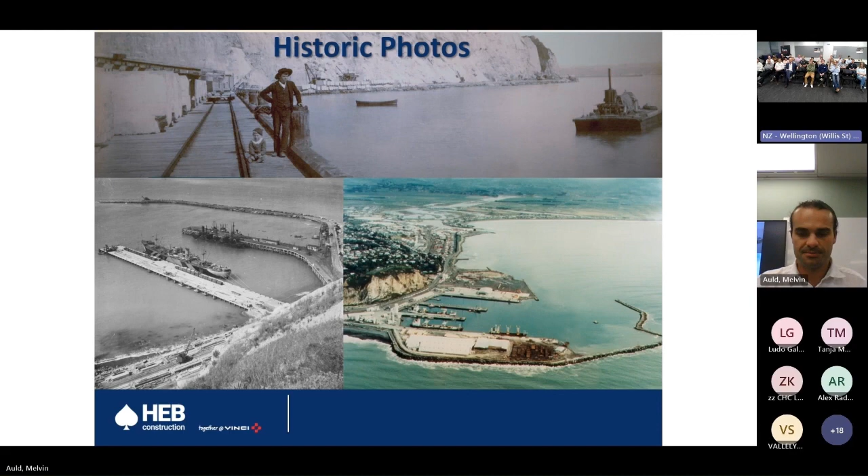Project conception and timeline. Why was a new wharf needed?

There were several reasons, but the primary reason was shipping congestion. This arose when ships longer than 250 metres were moored at number 5, rendering wharfs 1 and 2 unusable during those periods. That was costing Napier Port significant money, so they looked into an option to design and construct a new wharf.

Moving into the timeline of the project, 2006 it kicked off with optioneering on locations for a new wharf. They searched around, and from 2006 to 2015 they looked in this area, but that came unstuck with resource consent because it was going to affect the beach, fishing, and diving.

So then, 2016 to 17, the new wharf was planned to be put out here, and Beca engaged to do some design work on waves, erosion, and sediment control.

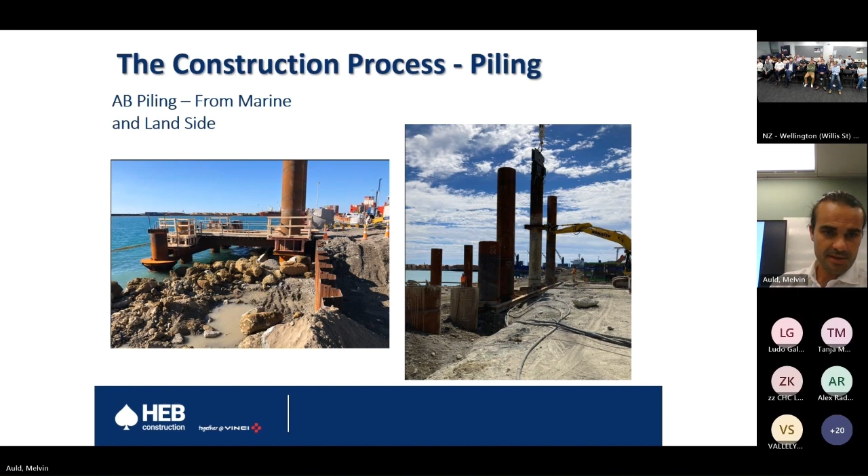We move on to the second stage, the CDE gate. At this point in the project, it was HEB's biggest piling gate, and it would cantilever off the first two rows of piles. We'd then put a couple of temporary piles in at the far end, balance off that, and install the permanent piles.

We had a few issues on the piling front — I'll talk through two of those: rocks and gas. Large rocks were found left over from an old revetment. Hitting these resulted in crushed casings, so we required a probe piling installation, welding on shoes and breaking up the rocks before the permanent casings were put in. This slowed the start of our works, but it only lasted 40 to 50 metres, and then we could go back to normal piling once we got off the alignment of the old revetment.

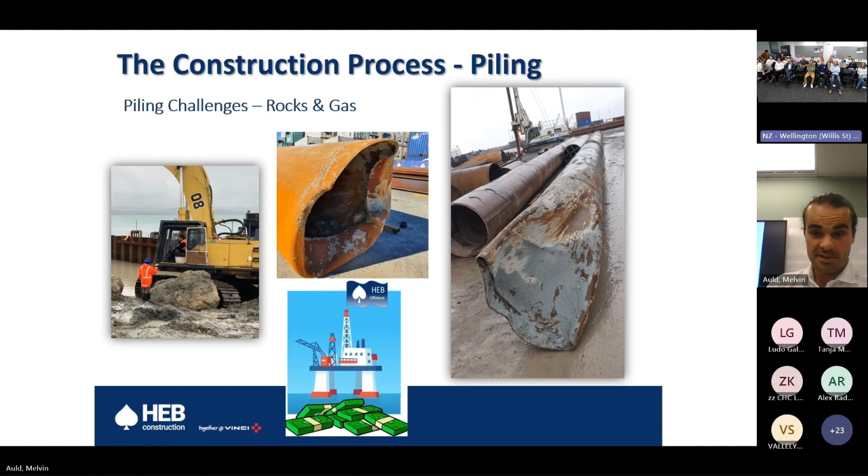That's the piling. Onto the revetment. I'll talk a bit further about this one, this was my section of works. You can see the typical cross section there, and then the plan view down the bottom.

I believe Beca designed the revetment in a simulation pool in Australia, and that was done in the ECI stage, so when we turned up on site, the design was complete. You've got an underlay of rock sitting on some geotextile, and then a series of blocks on top, nicely stacked together. The different colours refer to different dimensional blocks, so there's a whole range of them.

I talked about the rock getting barged down from Whangarei, so there were 16 loads of rock barged down. That last barge load, we had to be pretty calculated to make sure we had enough and didn't run out and have to order an expensive balance load.

Also in that photo on the right hand side, you can see our precast yard where we had around 20 to 25 moulds, and we'd pour those blocks there and then store them on site. You can see some down at the bottom right hand side that I'm laid over.

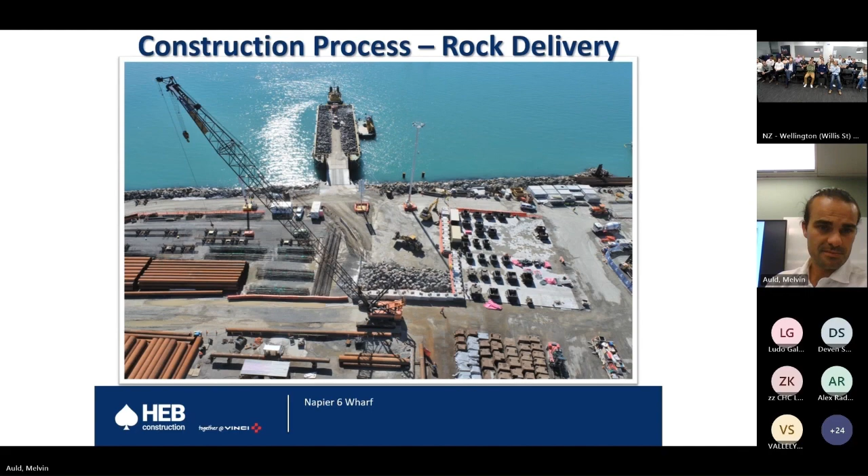Won't talk too much about it, but we placed cloth with this gadget out here that would release the cloth over the piles, and then when we're outside of the pile line, we held it together with some reinforcing to make sure we got the overlap required.

The rock placing we did with a rock bin, we'd split it up into different zones, different bins, and the operator would place a nominated layer over the whole revetment. Then we'll move on to the next one.

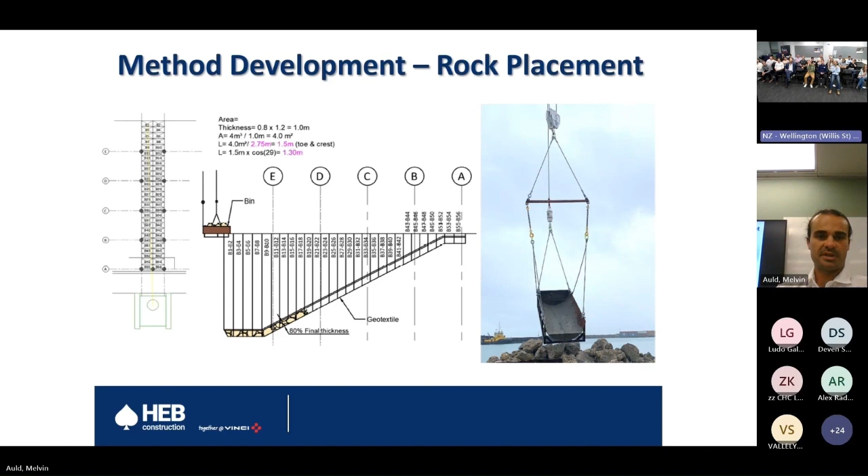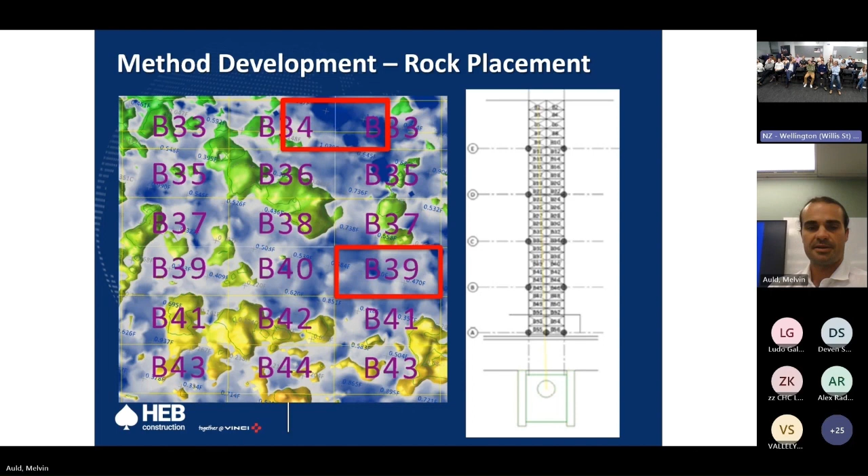So that's the rock onto the armour blocks. We originally started with 7 types of blocks, this is the design when we turned up, and we needed to work out how we're going to place these blocks and how it's all going to work.

The first bit of work we did was a trial with the blocks to work out in the quarry in Whangarei how they would stack up. We quite quickly realised with Beca there that we needed some tolerance built in, otherwise the blocks would end up on the top of the crest in no time, just with no play. So we put a 50mm chamfer on the blocks, so they would come down, and that allowed the blocks to take up that tolerance for when they were on rocks and not on a completely flat surface.

Then we moved on to working out how we're going to place it. We had a few different options that we looked at, using the crane, using grapples, using grabs. We decided that we needed a fixed grab to be able to physically force these blocks into place, and just releasing them with a crane and one of these other contraptions wouldn't give us what we needed.

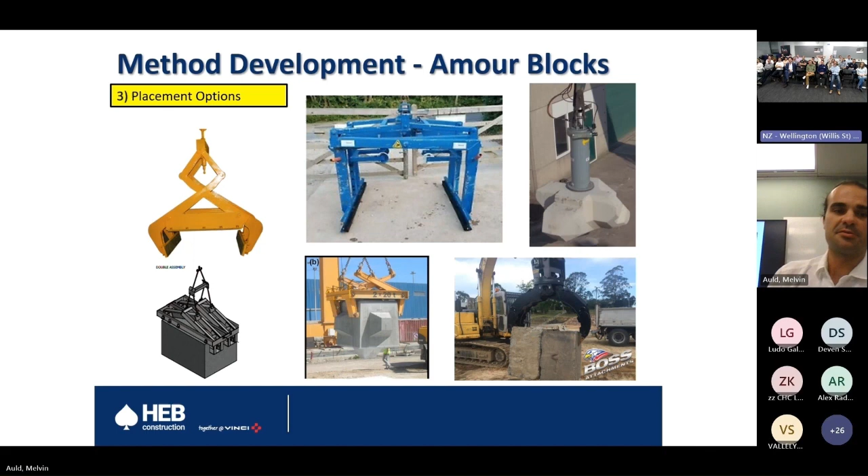The tilt rotator - we were lucky that there was one already out there large enough. So now we knew how we wanted to place them.

So the next thing we looked at is how we grab these blocks. We proposed a recess into the block so we could physically grab it, and we'd be grabbing the blocks from the same position each time. That would give us some certainty around placing them.

And with that, we realised that the blocks above the piles needed special inclined recesses so that the grab could actually place them. See the clash there.

And then also the blocks didn't have a design tolerance built in for the piles, so we were able to show that we needed some tolerance there. So we worked on some 'bird's nests', as we call them, to take up those tolerances.

So our 7 blocks grew to 15 different types there. We had to keep track of all of this while we were precasting and knowing where the different blocks needed to go. It's just a 3D image of the grab we signed off.

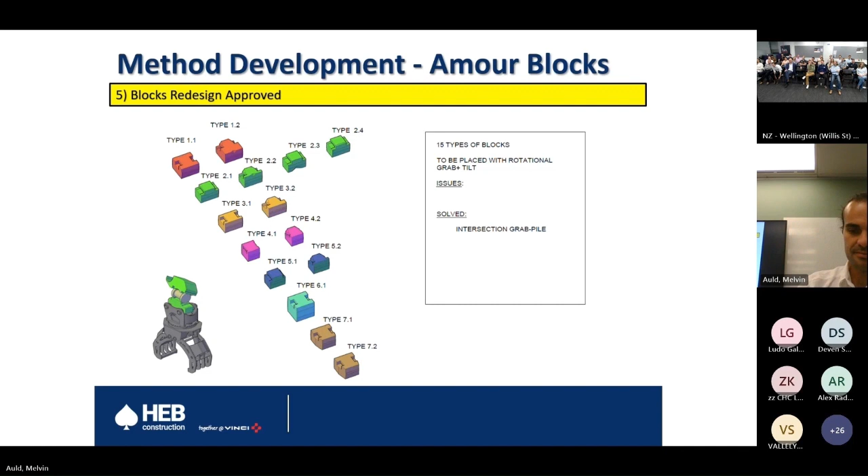I won't talk too much about it, but there's quite a bit that went into the actual surveying, installation of a sensor into the grab - not something custom, so we had to work through that.

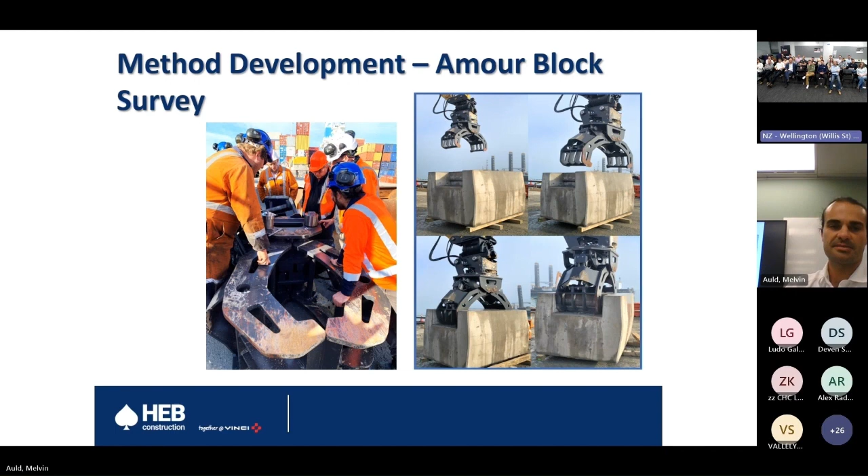So we would work down the wharf that way, and then there's about 100 metres at the western end of the wharf that had revetment to construct, but no piles. So we used an outfit from Picton - some of you guys might know him, Bo, from Nautilus - and we had our 120 on the barge, and we were ferrying blocks onto it.

You can see one up the top end there, landing on the barge and placing it. Quite a few tricks around placing blocks off a barge there, which we learnt.

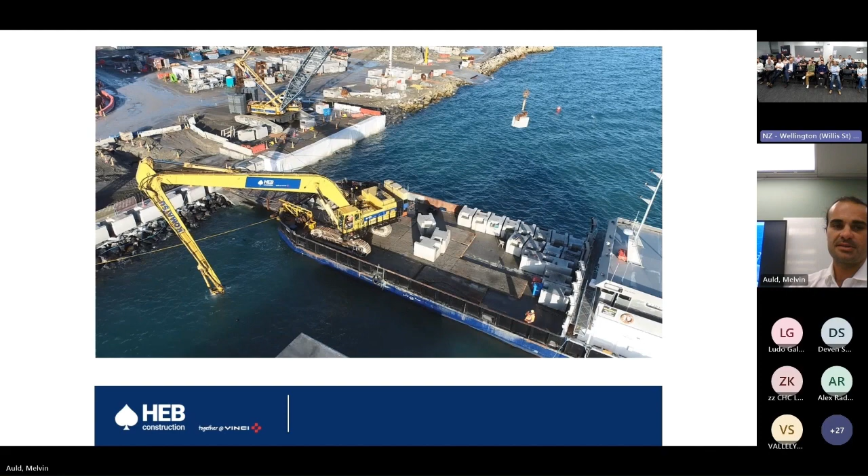So some of you might be asking how the operator knew what he was seeing, placing some of these blocks, well, the toe was down 14 metres and no visibility. So we had a system called Trimble Marine Construction in the cab, and he's pretty much playing a computer game.

But we had to work with Trimble to come up with this too. So I'll just push play on this.

So this is the operator placing a block. He's reaching down - it's got a few different views there, but he's basically putting the green block within the red block.

The tilt - he's got the rotation.

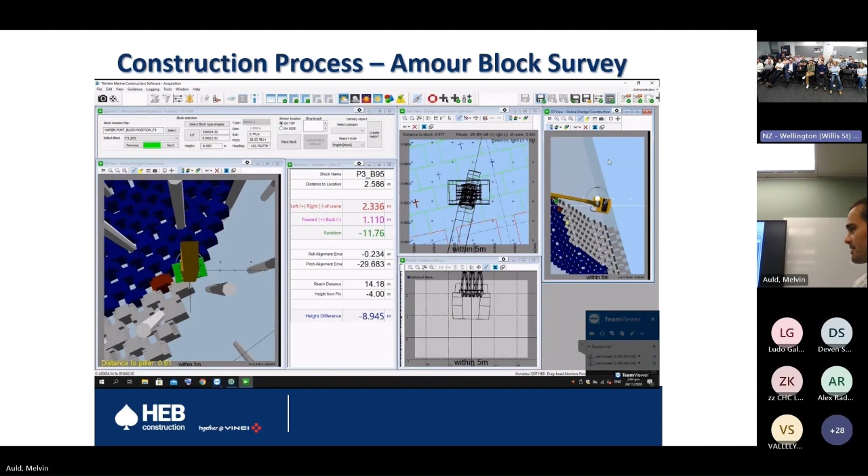So it wasn't any old operator that could do this. We needed a young guy with some skills. We started with quite a few, to be fair, but yeah, we ended up with a guy that does 95% of them.

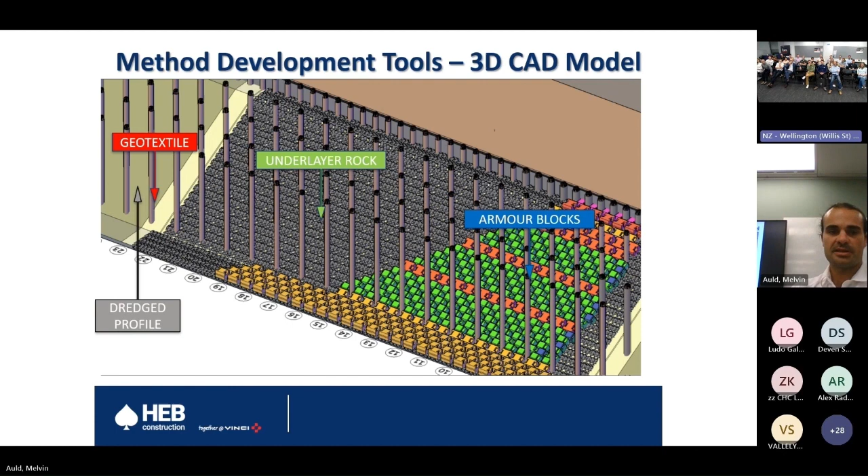It was, yeah, we needed to create our own 3D model - we were just working off the 2D drawings. So this gave us good insight of what we needed to do, and constraints around piles and diggers, and also presenting it to the guys and showing them where to sit and how to place it.

Another tool we had was a scale model, and we placed a whole bunch of rock on there - I'll just skip through this - but it was another good tool to show the guys on the ground what we're trying to do, and troubleshooting with them and Beca.

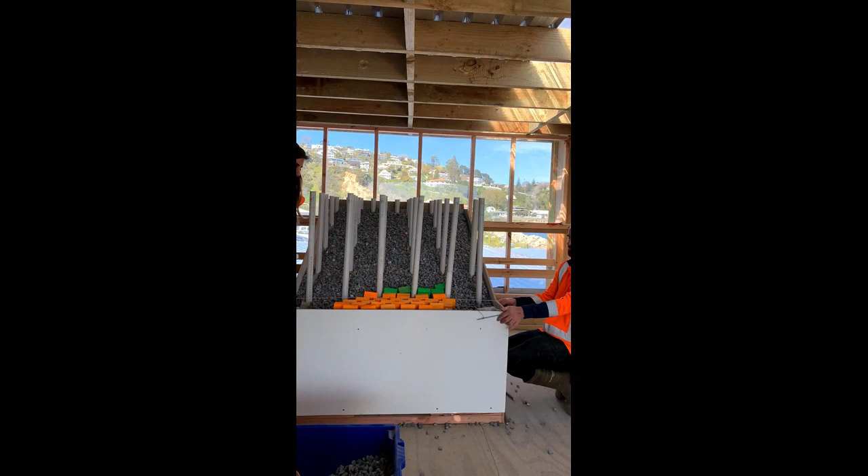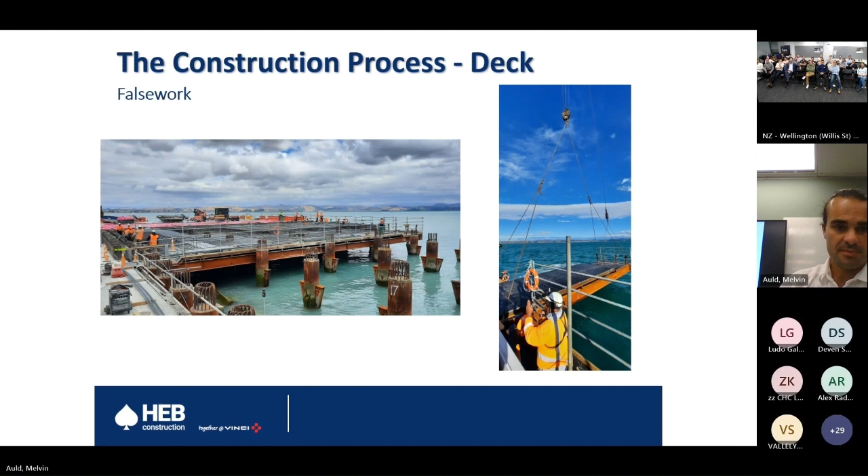It's another view of the first concrete pour happening. So it was a big push to get that through before December, before the end of the year. I think it was 2020.

The crane would walk on the previously poured concrete once it had hit a certain MPa, with the reinforcing on the landward side, and he would operate from there and then pull the forms out. We were getting 8-day turnarounds for a pour, and there were about 30 pours total to be done.

Moving on, I threw this one in here. I couldn't not share the crew we had there. We had a whole bunch of good people and quite quirky people as well, and it just brought out the best in everyone.

Down the bottom there, that's our construction manager. Some of you will know him, Nick, beating up our supervisor at a Christmas do. This guy up in the top right was called Boots. He was fairly quirky, he had pink hair and a set of tits to go with it.

It just all added to it, and it was a good environment. Bottom right, we were lucky enough last year to take out the contractors award for over 100 mil.

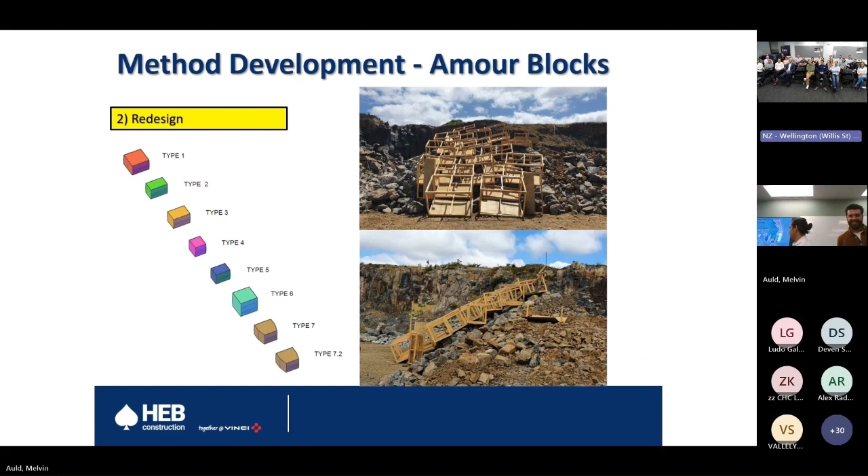Yeah, sounds good. Right, so the question, just for anyone who didn't hear, is just how the moormaster's going, with I understand you have quite a tricky wave frequency out there.

So the additional moves required from our marine team and the shipping lines was significant. The initial basis of the business case was to get those larger vessels outside that inner harbour area. So now we bring the vessels past the vessels on 5, with 5 being our number 1 container berth.

Cool. Do that. Yeah. Thank you.

Moving on to the Moormaster question. We've definitely had our challenges bringing a new piece of technology into a space where we weren't all as experienced as expected. As with anything new, it took about 12 months for us to get into a position where we're getting great utilisation out of that berth.

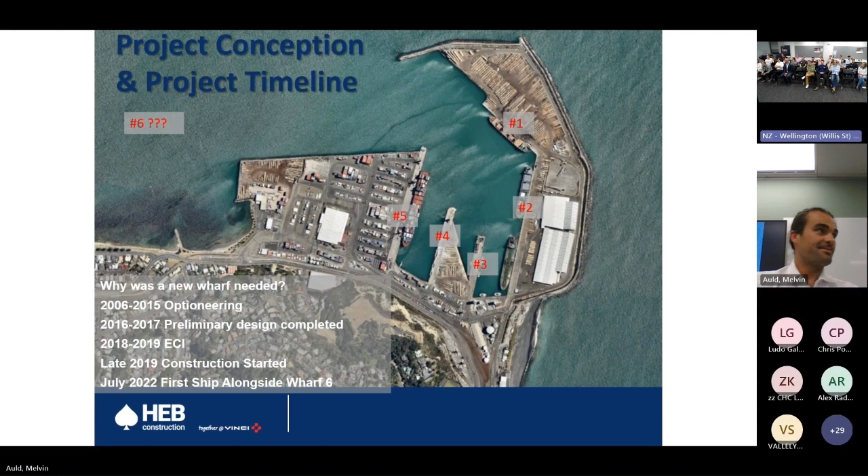That's awesome. I'm Andy Brown, part of the PIANC committee and an engineer with Tonkin and Taylor. I've been asked to jump up and tell you a little bit more about PIANC. Does anyone know what PIANC stands for? No? The chair doesn't either, so that's a good start. It's the Permanent International Association of Navigation Congresses, which is a bit of a mouthful, so it's now referred to as the World Association for Waterborne Transport Infrastructure. It's been around for about 140 years.

Its primary function is basically to bring people together working in this industry so that knowledge can be shared. As Matt was saying earlier, one of the big key outputs of PIANC are these technical publications, which you're probably quite familiar with, some of you as design engineers. They're developed through a series of technical working groups through four commissions.

So you've got Maritime Navigation, Inland Navigation, Environment, and Recreational Navigation. They bring together experts from around the world to create those working groups, which go on to create the publications for use by us. Another key thing is PIANC aims to support your career through mentoring, providing a platform for networking, and events like this. I'll leave it there for now, but I'll jump up later and tell you a bit more about the benefits of being a member.

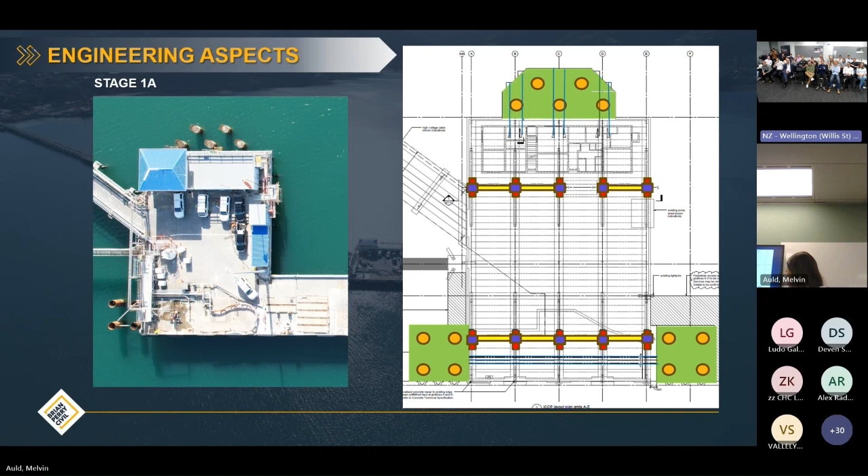Here's a picture of the gravity clamps we're installing around the raker piles at the moment. After we have all the new structures installed and post-tensioned, we're going to install jacks on each side of these gravity clamps. We'll jack the wharf a little, cut the raker piles to separate the existing structure from them, then remove the jacks, and the structure will sit on some plates.

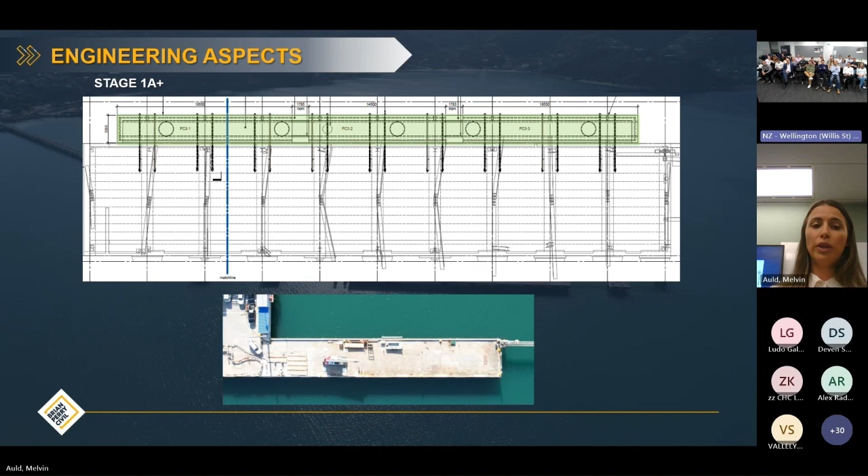Stage 1A plus is basically a new structure on the back, connected to the existing structure the same way as the pile cap on the back of the main wharf extension, with post-tensioning stress bars. Stage 1B involves 2 new mooring dolphins, A and B. On MDA, after we finish building the new mooring dolphin, we are also going to demolish the existing one once the new one is up and going.

During the presentation, I'm going to focus more on the challenges with construction. Because we're talking about Seaview, the first thing we talk about is location. The area is extremely exposed to high winds, especially the southerlies, which makes the job quite interesting.

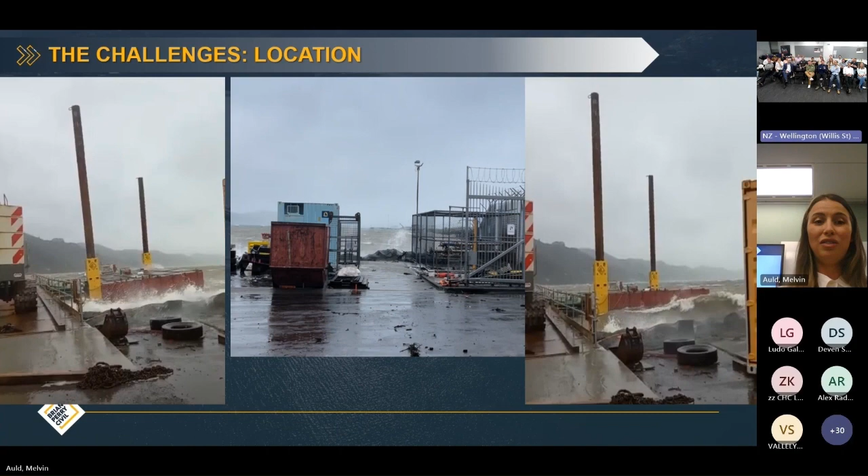This is one of the reasons why we need to do the project mostly from jack barges. We installed a temporary staging structure close to our compound to assemble the barges and to load and unload them as needed. The good thing about jack barges is you load the barge as soon as you are located where you need to be to complete the works. You jack it up, usually to a meter and a half above high tide to allow for waves or storms so it doesn't affect the barge, and then you have a very stable platform to work from.

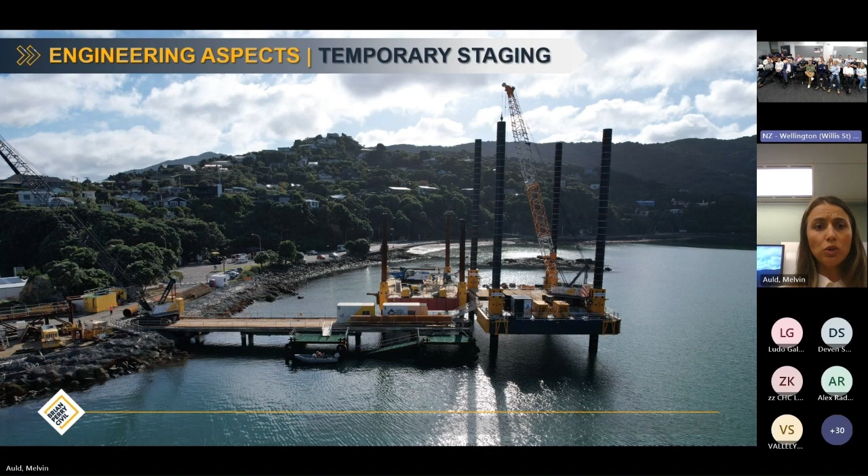So that was one of the reasons that the job was chosen to do from a jack barge. This is the video of one of our jack barges with the 250-ton crane on the deck. That helps to complete the works for piling and to do all the heavy lifting on the wharf as well.

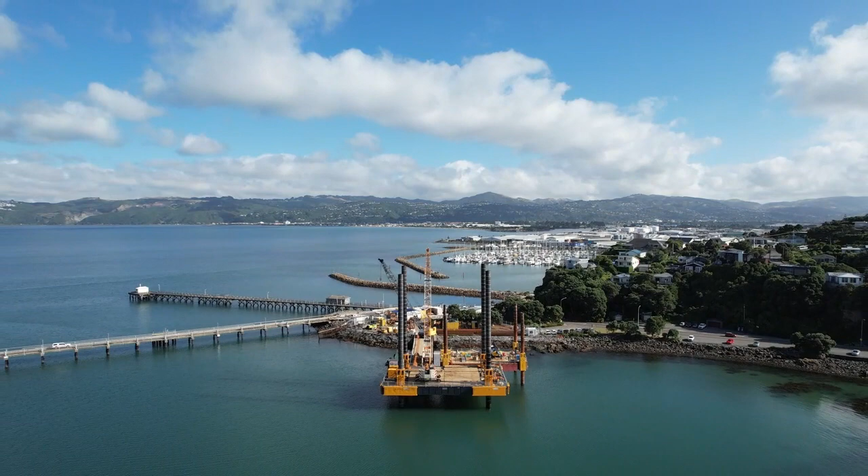Space as well is another thing. We don't have a lot of space on the wharf, so because of the situation with the structure, we don't have a lot of opportunities to put equipment, tools or material on the wharf. We kind of found space to set up our compound, but anyone who's been in Seaview before knows it's really tight anyway. So we have a bit of a lay down area, but not much. We try to reduce the amount of work that we do in situ, so the more we can do off-site and just bring it to site when it's ready for installation, we try to go that way.

Another challenge that we have is the environment. Seaview Wharf is located within the Wellington Harbour, which is the habitat for several marine species, so we need to be careful when working around them. An example is before we even started the project, before we even started building our staging, we had to find a way to protect the penguins nesting around the riprap on our compound area. We found that installing netting on top of those rocks would stop the penguins from going back to their habitat, which wasn't very nice, but it worked.

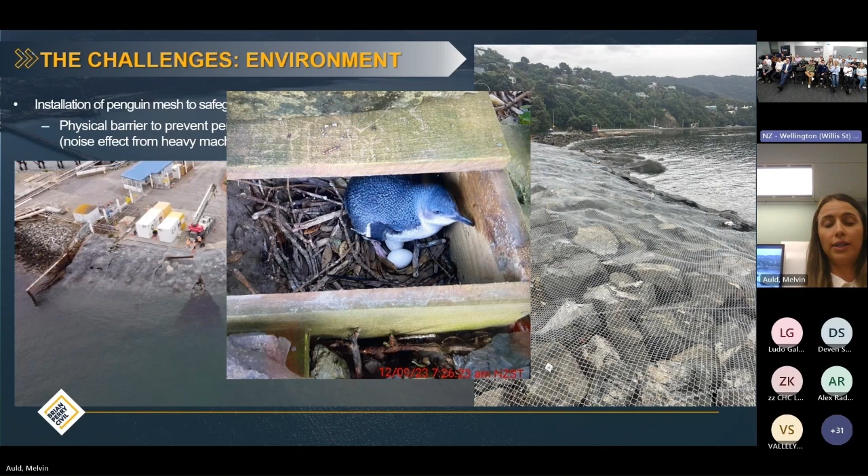We had to put a lot of management plans in place to start the project as well, and abide by the rules of our resource consents. Another challenge, and this is a big one, is that throughout the project the wharf remained operational. So we work with outages - we have two weeks of outages where no ships can berth on the wharf, and then two weeks where we need to work while the ships are in there.

So we've come a long way since we started the project. At the beginning, it was really restricted - we were not even able to walk down the wharf. The fuel industry didn't want us around them. But then after a while, CentrePort managed to get a matrix of permitted operations to have us working around those ships when they were there. So these days we are able to do a few things. It is still quite restricted, but much better than it was before.

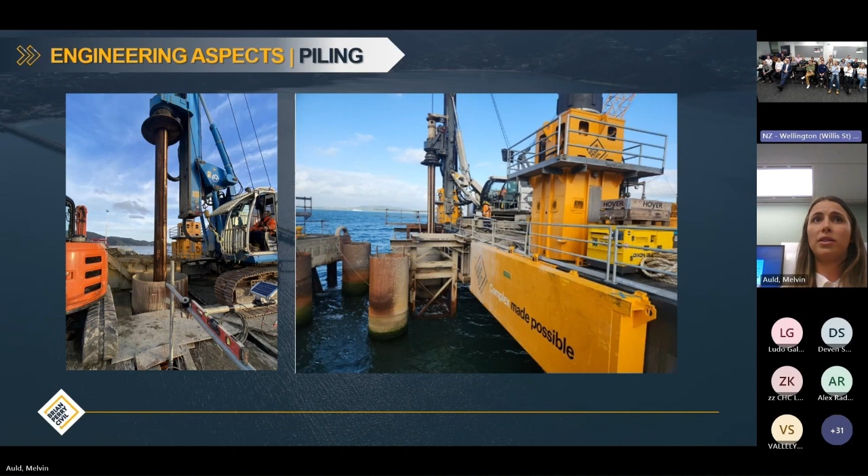Piling - construction aspects of piling. Here's a photo of the drill rig on the barge with some piles already installed, and the drill rig drilling one of the piles. The piles are 1.5 meters in diameter. The casings are about 23 to 25 meters long, very heavy, so we're glad that we have a big barge with a big capacity to lift everything in place.

The thing with the mooring dolphins is because they are so far away from Seaview Wharf, the ground conditions are a little bit different. It's a little bit softer, so the casings had to be about 5 meters longer, which made things more complicated. So we're not able to lift everything in one piece anymore, and we need to splice it in place, which takes a little bit longer to finish one pile.

The photo on the right is one of the concrete pours we're doing, a tremie pour for the pile. We need to overpour 500 mil to achieve good quality concrete from the bottom to the top. The skip on the side catches all that slurry and the overpour, so the team doesn't need to come back later and break concrete, because you can imagine how hard it is to break concrete in the middle of the ocean.

The concrete cutoff level is really low as well, so it's really hard to work there at high tide. When we're doing a concrete pour during high tide or with a bit of bad weather, we're not able to do this, so we overpour and leave it there. Then the next day, the guys go back and break the concrete.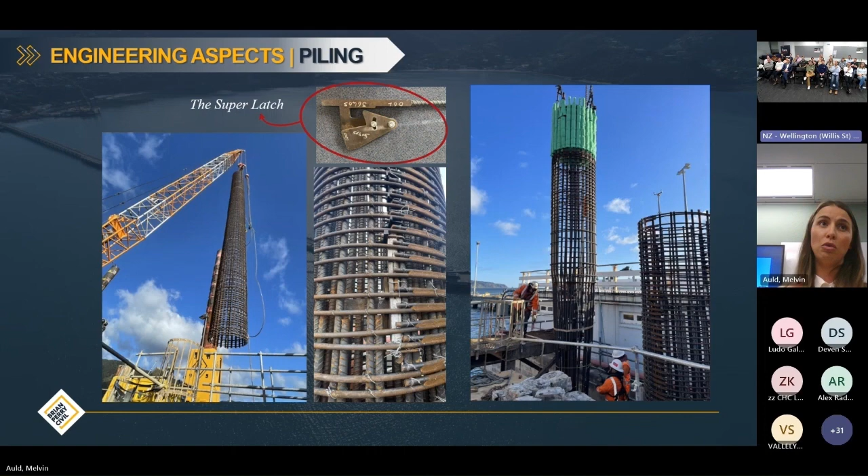Another thing we did in this project was implement a different type of splicing on the cages. In New Zealand, usually when you splice cages you use U-bolts, so the guys need to put their hands through the cage and splice every single bar with U-bolts. Because the cages were very long and heavy, we came up with the idea of installing a 'super latch' on one cage section, and plates on the top section. When you install the top section, the plates go inside the super latch and it locks. So you save time and remove the risk of guys having their hands through the cage.

When we're doing piling, we also need to monitor the electrical conductivity of the water, because Seaview Wharf is located in the Waiwhetu aquifer area, so we need to keep an eye on that. We also need to do underwater noise monitoring, because installing the casings with a vibro hammer or drop hammer, and drilling as well, creates quite a lot of noise underwater. So we install a bubble curtain around the piles - basically some pipes connected to a compressor that release bubbles, and that curtain of bubbles mitigates the noise dissipation.

One nice thing was the first bubble curtain we bought before starting the project was from Canada. It was just a massive pipe we had to put around all the piles, and we had to use divers and put weights on it to keep it at the bottom of the seabed. As we went from one pile to the second to the third, the site team came up with a very good solution - building a new bubble curtain that would go around one pile, since we only do one pile at a time anyway. It works even better than the one we bought, and I must say, the one we bought was really expensive.

Precast elements - like I said, because of the location of the works, the weather, and the level of the wharf, it's really hard for us to do everything in situ. So we had several meetings with CentrePort and the designer to come up with a few ideas on how to build those pile caps.

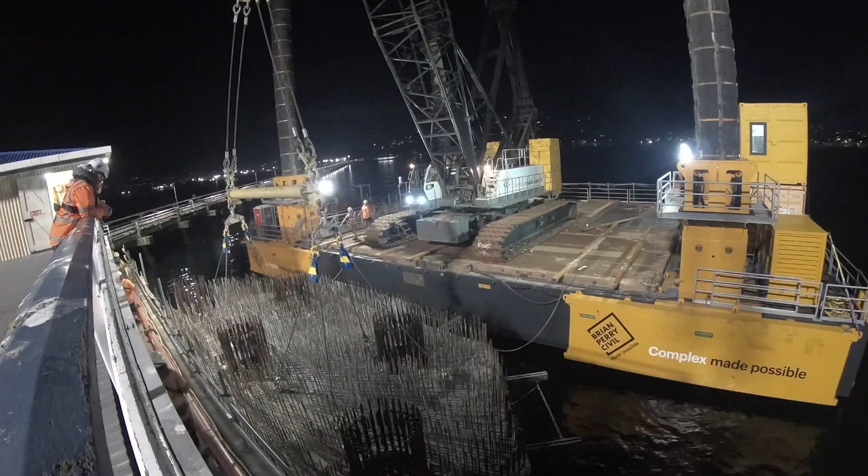In situ works. So I just put a few pictures here for you guys to see how hard it was to work around the wharf. The level of the wharf is really, really low.

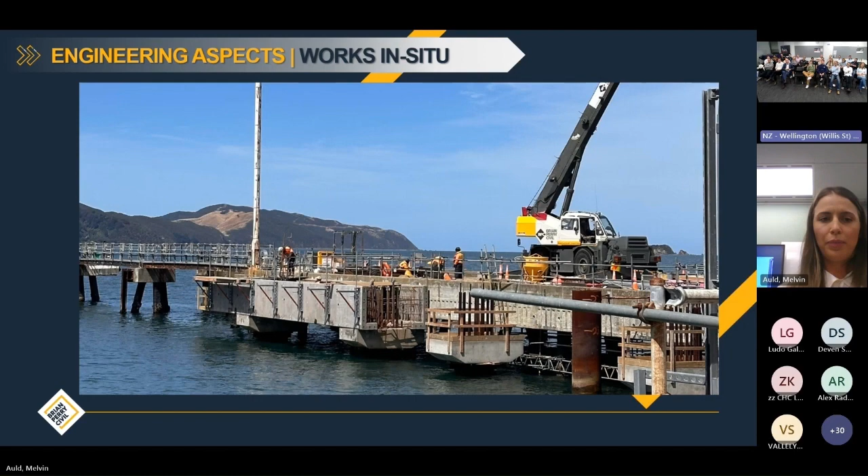We need to have handrails everywhere. We need to have platforms everywhere. We need to have access to under the wharf everywhere. So most of the works on site are done from the boat or from these platforms.

Here more platforms. Here's a photo of the platforms that we had around BDA and PC1 after a bad weather day. So we came back to site and they were all gone.

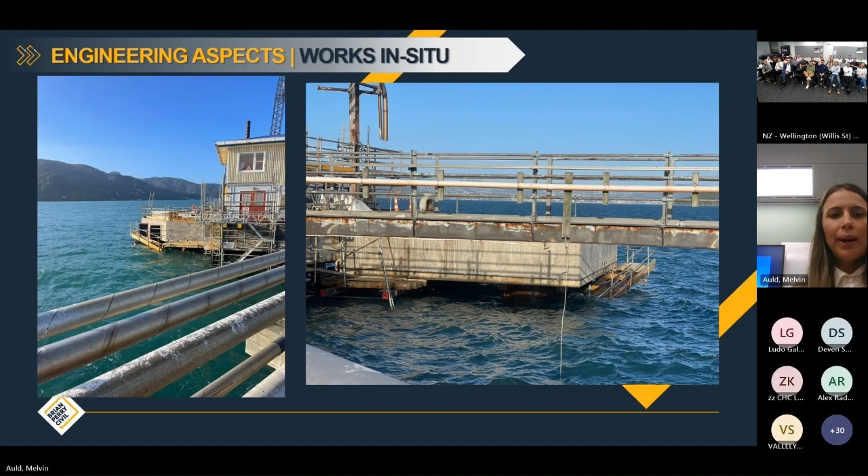Lucky enough, we had finished the works in there, so we were about to remove anyway. But I think that showed us that we made the right decision to go with precast soffit and avoid doing more in situ works.

These are the platforms that we installed at the beginning of the job to start the works with the gravity clamps, because before you start the gravity clamps, you need to clean the piles, you need to do a bunch of things under the wharf anyway.

This is probably one of the hardest jobs that we need to do on site, because here it was a high tide, almost high tide, and you can see what is the clearance that the guys have under the wharf. So you just have probably about 3-4 hours to work on a daily basis, and they still have wetsuits and special PPE to work under there, but it's really hard.

Here is a photo of the guys grouting one of the gravity clamps. So the platforms that they are standing on is a fixed platform that we put at the beginning of the job. Yeah, but there's not a lot of space for them in there.

Photo of Olga, very proud of her gravity clamp. And here is just another photo, because we have tried different types of platform under the wharf.

So the first one, we're happy with. The only thing is you can tell how much seaweed you get around the platforms. It's not ideal. Very frequently we go back to site on a Monday and the platforms are gone, down at the bottom of the ocean. Then we need to send divers to pick it up, bring it back, and basically start from zero again with inspections, checking every single bolt. So it's a big deal.

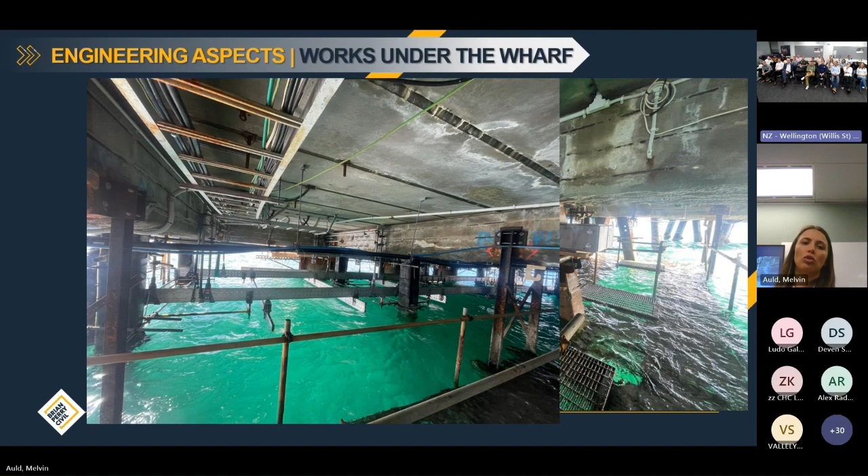But yeah, we are getting there. So far we have finished almost all the piles. We have 2 piles to go that we should finish next week if nothing goes wrong. We have finished PC1 and BDA, done the precast for BDB already, and we're starting the precast of the mooring dolphins. So yeah, it's going well, but lots and lots of challenges.

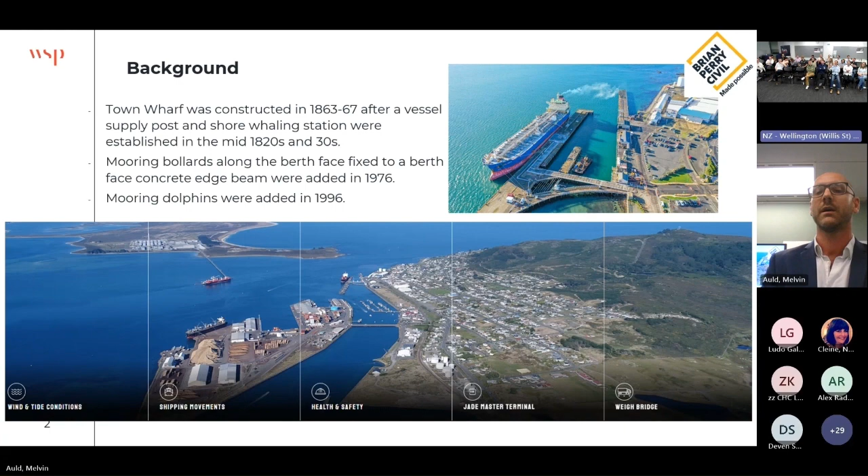The Town Wharf structure has been modified through the years. Berthing and mooring demands from large tanker vessels obviously exceeded the capacity of the original wharf, even if it boasted an undeteriorated state. The Berth 11 arrival passage plan gives a good feel for the geography of the site.

The structure was inspected periodically. A reduced level of service, with localized cordons, was included in a condition report in 2006. The wharf was reported as beyond routine maintenance, with physical remaining life exhausted by 2016, with the conclusion that reactive and continued maintenance were required to extend its useful life.

But we're seeing this sweat-the-asset, extend-the-service-life, deferment-of-maintenance approach across multiple infrastructure clients, across lots of industries and across ports. Ports are doing a great job on limited budgets to manage asset condition, to manage level of service requirements, and to assign priority to competing cost centres - a real unenviable task.

I'm reminded of a mid-lockdown webinar by the then head of structures at KiwiRail, who described rail engineering as aged care. So SPNZ commissioned the design of a new access structure and discharge platform late in 2018.

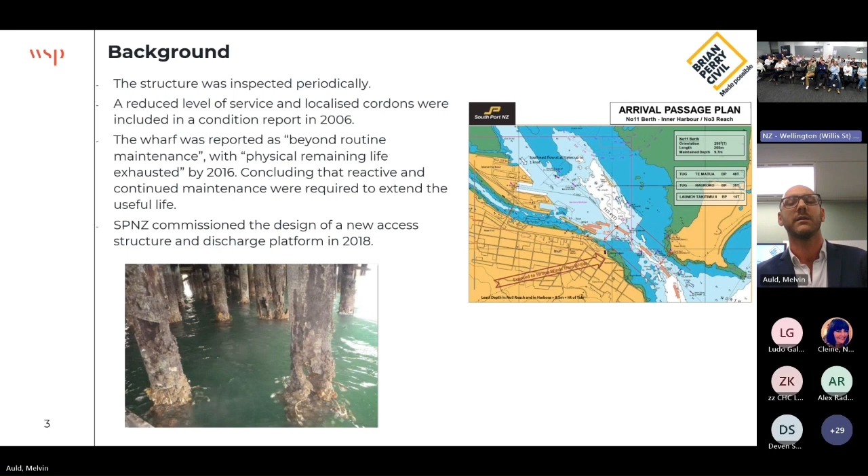There's a massive lesson to be learned here, and it would take someone braver than me to expound on it, but budget setting with known unknowns and unknown unknowns is fraught for designers, contractors, clients and boards. Contingencies, escalations, risks, price realism before the outset is a real minefield. The New Zealand Inc. recent project experience proves that no matter how on the hook a client might appear to be for ferries, schools, cycleways, public transport, waters projects, resilience projects, shovel-ready projects, or RMA fast-track projects, cost increases from old and optimistic budgets still carry risk.

And as a bit of a side pitch, the array of inspection, repair, replacement, strengthening and new build projects that we have means we have a bank of info to help with a large number of insurance valuations across ports in New Zealand and Australia.

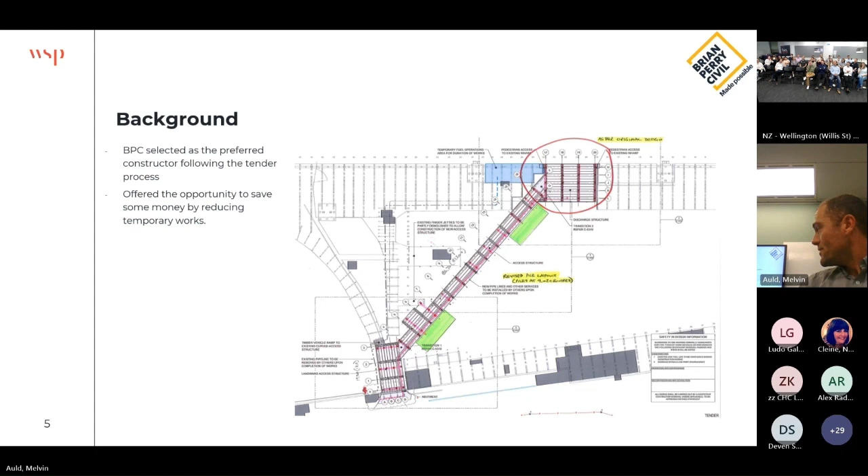Based on that, we were the cheapest price, but still significantly more than Southport's budget. They didn't want to go ahead. So we got the news that we weren't going to be building it because we were too expensive, and we started to look at what this thing actually needed to do.

For a kickoff, it needed to support the discharge pipeline. Pretty standard. It needed to withstand highway vehicle loading, but it didn't need to take a B-train, just needed to get a ute or a light truck out there. It needed a 50-year design life. Some things were nicer to have, like being durable and maintainable. There was no massive value placed on functionality beyond that - this was definitely a function-over-form structure. It also needed to be constructible in an operating port environment.

As Gabby alluded to earlier, you've got to be able to stop and start construction like that. And as I said, there was lower value placed on amenity - they weren't really that fussed about what it looked like.

A few of our boys were on a business development trip down in Queenstown - how much BD actually got done, I don't really know. They were sitting having a cheeky glass of red wine by a fire in a pub they still talk about, and started thinking about it, realizing our temporary staging actually ticked a lot of those boxes. As Gabby showed earlier, when that barge was getting the hell beaten out of it, it was up against our staging, so we know it's resilient.

But there's a lot of things it doesn't do. It's only designed for a 6-month design life, and only designed for a 1-in-100-year return period event. We don't really worry about corrosion protection because it's never around long enough to rust.

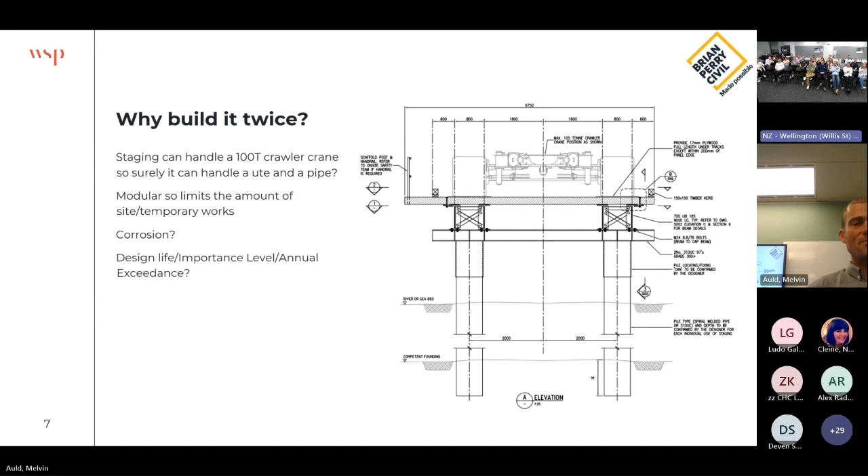To their credit, they liked that concept and took a calculated risk, entering into an ECI with us and WSP. What was really cool about this is I got to play a pretty big part in it - going and sitting in WSP's office drawing sketches like that, thinking they'd just get thrown in the bin, and they ended up in some of the design documentation, which is a little bit disappointing.

So essentially the way it sort of worked is that we came up with what we could build and we just threw that at Melvin and his team and went, you make that work. And they did very, very well and made it work.

So we did things like, we knew that we were going to be using a 100-ton crane. We put the main beams at 4 meter centers because that's the track width of the crane. And then we looked at things like, well, how far can we actually lift to do the next bent section?

So what turned out to be the critical thing was driving the piles, so having to lift a big dirty great 9-ton drop hammer. The maximum we could lift that was about 15 meters with the 100-ton crane. So that determined where the piles were going to go for the next bent.

And that meant we could build the first bent, sit on that, build the next bent, walk out onto it, build the next one, and just carry on as we were, like we would install our normal staging.

I guess there's a little bit of a comment there about we all love to talk about contractor-led design and how wonderful it is at ECI. There is a little bit of a risk there that you have to pick your contractor before they've had to go in through any price tension.

So I guess the difference here was that we proved that we were going to be cost effective by winning the original tender. WSP had done the same by winning the original design contract. We also brought in our supply chain really early as well. So we got Eastbridge involved - they were taken right through the design process with us.

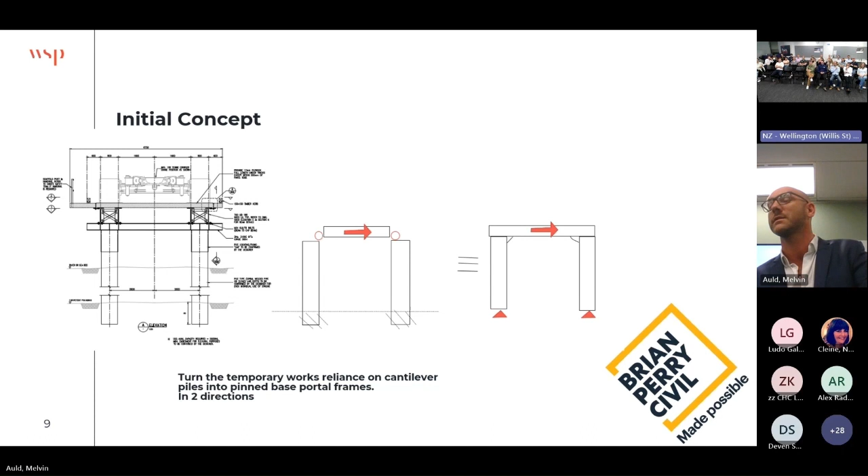Back to the smart man, it tells you how he actually designed it. Well, as Chris said, we started with confidence that the temporary staging could support a crane. Started with a contractor who had proven the system in previous projects. We started with an optimized pile spacing in 2 directions to suit the crane track width and its reach and lifting capacity. All we had to collectively do was take a cantilever pile concept as used with plenty of embedment in decent ground and make it work for shallow embedment in poor ground.

Take pinned top connections, make them fixed. Take a temporary staging, make it durable and stable for a 50-year design life. Take temporary construction loads, construction stage tolerances, relatively low importance structure, and make it suitable for the support of an oil pipeline in an active seismic zone. Added to that, it needed to be transportable, suitable for handling, suitable for assembly from and over a deteriorated existing timber wharf.

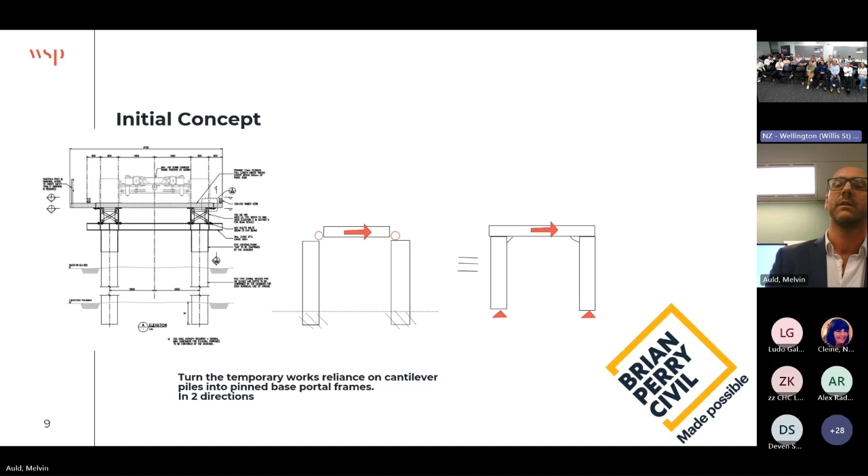So of the challenges and opportunities, we'll get into some of those connection details shortly. But I guess the process was that we had a design workshop every couple of weeks as the design was being worked through. In those, the challenges were brought and solved collaboratively, and the client was involved in those workshops, leading to fewer assumptions being made by everyone involved and just a better risk awareness.

One such risk that every geotech will claim is the need for more borehole data. When the client's in the room and the borehole data issue develops, they can see how it might be holding up a process or influencing the cost and contingency pot. You know, if a geotech engineer comes to me asking for more borehole data, or if I go to a client to ask for the same, I might not be able to demonstrate the benefits effectively. Well, the contractors seem to have that knack.

Brian Perry's were continually updating their construction cost estimate at each design stage. And so together we were understanding the concerns, the risks, opportunities and potential solutions.

This cross-section shows some of the component parts. Starting at the bottom, if the piles had sufficient embedment into non-liquefiable weathered rock overburden, the lateral resistance needed was inherent and everyone was happy. The peak pile axial demands happened during construction with the cranes on top, and that capacity was readily attainable.

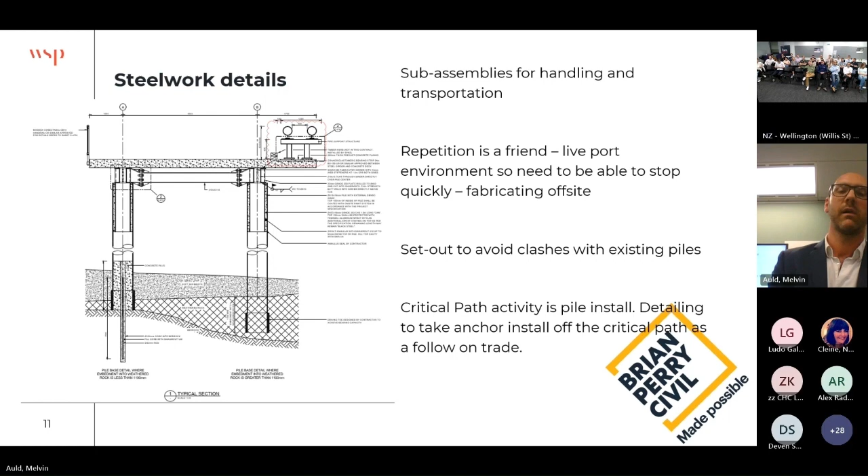Okay, into some of the details themselves. You see a can to girder connection with the internal access sleeve.

The biscuit, which was used to seal the underside of the can annulus, was attached to lines that were fed up through the sleeve to get a picture of how it might come together. The bolted girder beam splices located away from the pile location, and then the stub crosshead and that girder both fully welded to the can, and a gusseted moment end plate bolted onto the transom.

Piles were driven to close positional tolerance. Heads were cut off to the final level to receive the girders. Then the girders, cans and crossheads were all dropped as an assembled unit into the piles and bolted up. You can see the schematic sequencing for the access structure on top, and some of the sub-assemblies in the discharge platform on the bottom.

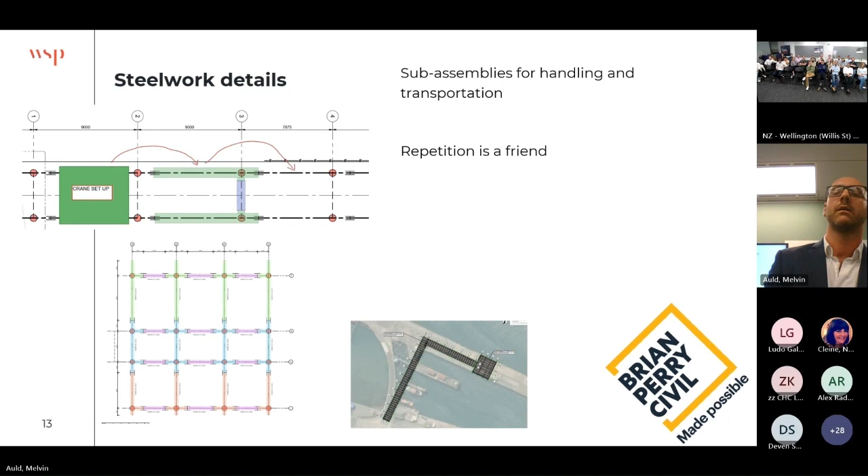As Chris said, the contractor wants to drive piles, drop in the superstructure, drive piles, drop in the superstructure, drive piles, and so on. But we had reasonable info on soil springs, on lateral capacity of the cantilever piles, in soils that were weak, though liquefaction wasn't a concern during that temporary stage.

We knew about the gap between the can and the pile, and about the frame capacity in the transverse direction. Although the temporary works normally sits in the contractor's wheelhouse, there was strong encouragement for us to provide some analysis outputs and confirm just how far ahead of grouting up the cans the crane could sit.

So a wee bit of analysis followed. You can see the plan view - the in-progress wharf structure is going to behave a bit like a Vierendeel portal frame.

We modelled it with some springs representing the force displacement property of the piles, both cantilever piles and fully grouted up bents, and arrived at the recommendation not to leave more than 2 bents of piles ungrouted behind the crane. So grouting was often done on a Friday afternoon or Friday lunchtime, leaving 3 days of no vibration curing so that concrete could come up to strength.

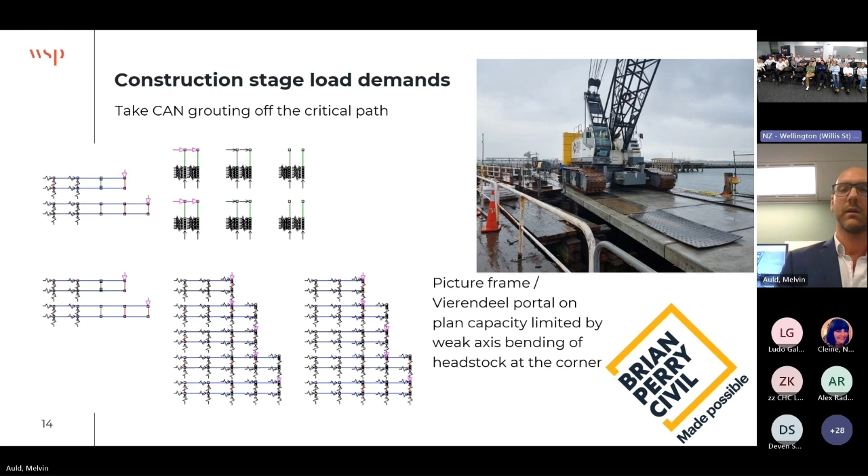A wee bit on importance level on NZS 1170 versus some of the international design standards. The Oil Companies International Marine Forum is silent on seismic design, but the International Guide for Oil Tankers and Terminals refers us to the Marine Oil Terminal Engineering and Maintenance Standards, a chapter in the Californian Building Code, written specifically for marine oil terminals in an active seismic area.

The MOTEMS has oil spill exposure classifications and performance levels to describe the seismic performance criteria. We considered these aspects alongside 1170 for the Town Wharf performance objectives.

Coastal Oil Logistics had advised that pump shutoff would occur within 1 minute of a leak during fuel transfer. So we looked at the fastest discharge rate, allowed a bit of contingency on the time to shut down the pumps, and estimated that the maximum leak from Town Wharf berth would be about 10% of what's described as a major leak in MOTEMS.

We then knew that there would be bunding sufficient to contain that maximum possible spill at the discharge platform and at interface locations where the wharf rounded the corner, where significant differential movements could take place. The pipeline itself was designed to accommodate those potential movements, and there was also appropriately sized and designed containment.

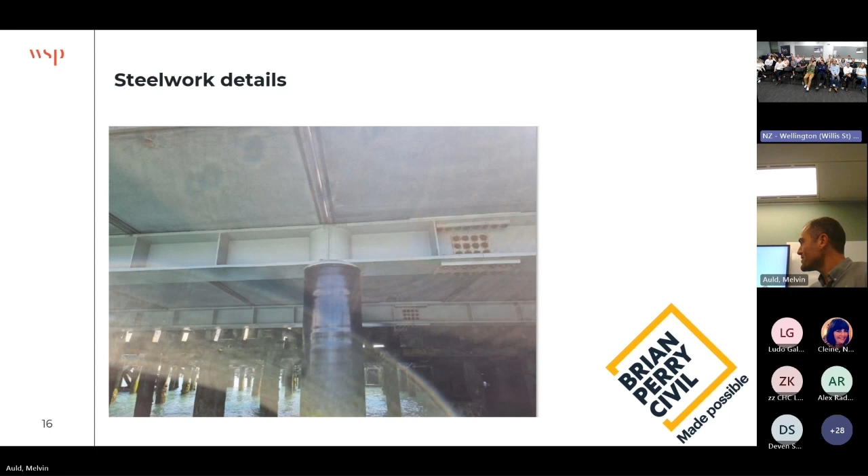I think when Melvin mentioned that I was a geotechnical person, it was purely so that I would do this slide.

So the ground profile throughout across down the alignment was basically very soft over very hard. If you want to put a more geotechnical bent on it, it's marine sediments that were sometimes not there or about 5.5 meters thick, over a weathered rock layer that was a silty clay that was sometimes not there or up to about 3 meters thick.

That was the layer we were relying on being able to drive through to get our toe embedment, to get that toe fixity. And then this norite bedrock, which all throughout the ECI process, we were warned that a previous contractor had come a bit unstuck and had started referring to it as the hardest rock in New Zealand. I don't know how true it is, but we weren't really that keen to play with it.

So, a few geotechnical challenges. Liquefaction triggering was expected in those marine sediments. This was only an issue for the permanent works design, so it did give us a bit of a win with the temporary works design because it meant we could rely on those marine sediments for a bit of lateral load on the piles.

We did, however, have a bit of a crust that didn't liquefy on the top, and so when you got that liquefaction event, you had this nice slippery liquefaction layer with this crust moving along the top of it, that provided a heck of a lot of load onto the piles. That was particularly niggly at the interface between the wharf and the reclamation.

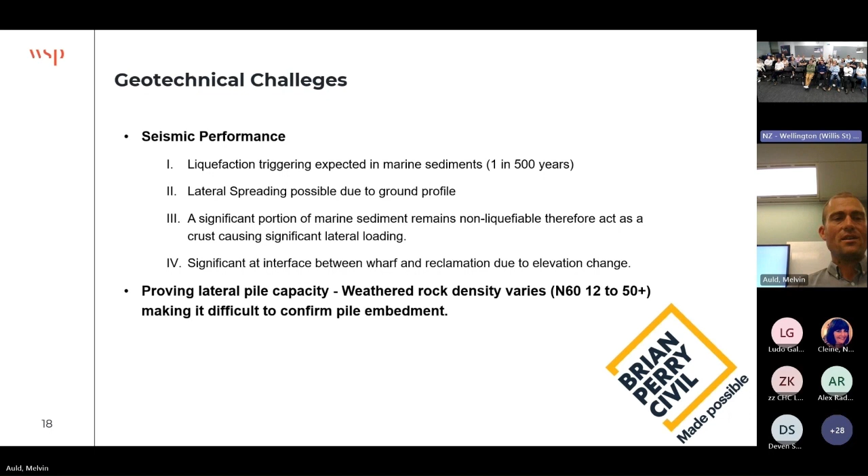Yeah, however, we still needed to work out - so the idea behind that shear anchor is if you don't get the embedment, then you have to put a shear anchor in. We still needed a reliable way of working out how we were going to determine whether or not we needed that shear anchor. This was something we came up with during the ECI. We proposed that we would bolt PDA gear, pile driving analysis gear, onto the tubes as we were driving them.

So then we would assess how far into the weathered rock we'd got using that. I'll talk about that a bit later. But once we'd achieved that embedment into rock, we didn't actually need to anchor the pile.

So we agreed the process we were going to go through. We're going to bolt the PDA gauges on, work out whether or not we need to anchor the pile. If we need to anchor it, it's going to cost this much. It was a provisional item, so it was pretty much locked in. Clients were able to say, well, if I need to anchor all my piles, it's going to cost this much, and if I have to anchor half of them, it's going to cost this much. So they were able to do really good sensitivity analysis.

So those driving correlations, as Melvin said, we drilled a couple of boreholes at a couple of the early pile locations and logged them. We worked out where we thought the weathered rock kicked off, where the borehole showed sufficient strength to provide that toe fixity. Then we drove a pile with some PDA gauges on it and worked out what the driving resistance was at that point.

Then when we were driving a production pile, once we'd achieved that driving resistance, we just kept going either until we got the set, or potentially sometimes we got the set and had 800 mil embedment.

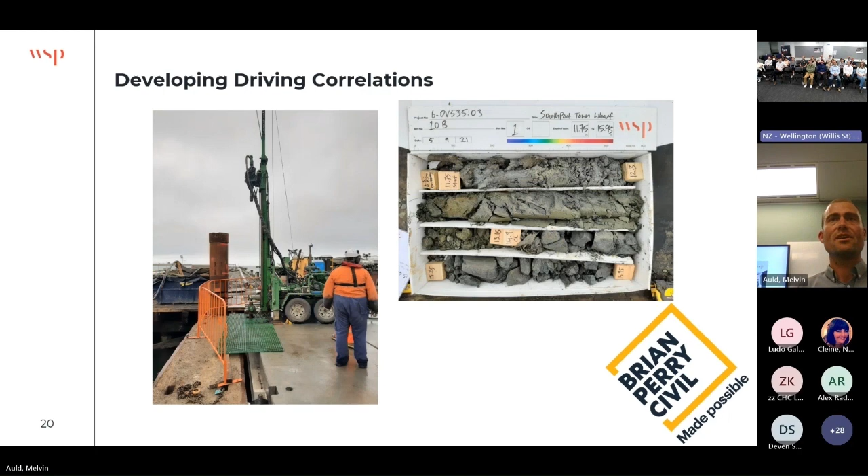So this is a bit of an example, you wouldn't believe it, but 2,000 kilonewtons was the number we came up with for that driving resistance. It was a nice round number. No matter how many times I did it, it came up at 2,000 kilonewtons.

What you can see there is that green line and blue line are the penetration resistance per blow for pile A5 and B5. Once you get over that driving resistance at about 6.2 meters, we just carried on driving, and where we were able to drive it further, you can see those ones held up at about 8.32 meters embedment.

Thanks for coming, we've got our toe fixity. We don't need to put a shear anchor in.

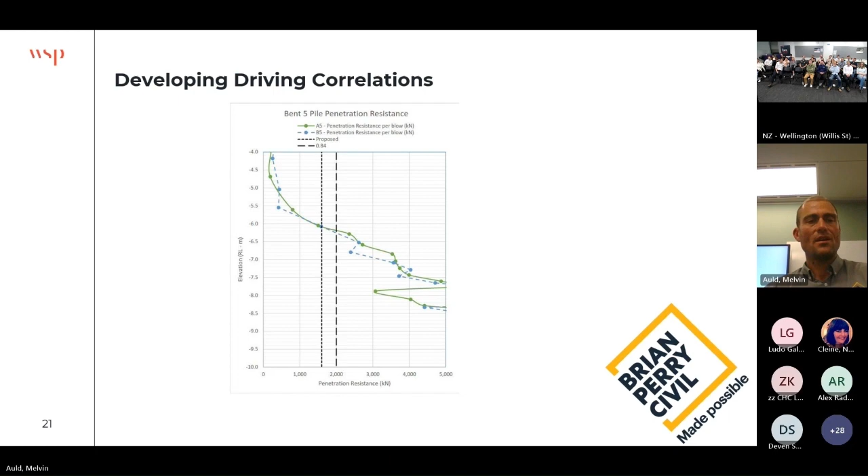If we did need to put a shear anchor in, this is what that started to look like. So even just dropping the piling hammer off and putting a Benoto bucket on. The Benoto bucket's a cool little bit of kit, but they're certainly not the most technologically advanced, and they are slow, so we would have to drop the hammer off, pick that thing up, and start excavating out a pile.

All that Benoto bucket work was on critical path, so we couldn't put the structure on. We could Benoto out and not have to put the anchor in, but we had to do the Benoto work before we could put the next bit of structure on. So it's a pretty sloppy, slow operation, and when it's on critical path, it's obviously much better just to do that extra hour's driving.

Cool, a little bit of chat about temporary works. Obviously the first iteration of the design had quite a bit of temporary works. For the second iteration, this one, it was pretty much about 4 items.

So we had pile gates. Essentially we had a big old timber wharf that was reasonably sturdy. We just cut holes in the wharf and dropped the piles through those. We did have to brace some of the deeper water sections because we had big free length on the piles, and so things start to move around.

100-ton cranes work better when they're more or less still rather than waving around. We had a bit of formwork for the discharge platform, that was just a pretty basic Doka system. And then this thing in the bottom right corner is just a little access structure made out of slim soldiers that we lifted with the crane, dropped into place, and that gave the guys access to bolt up the next bent as it went on. That was pretty much it.

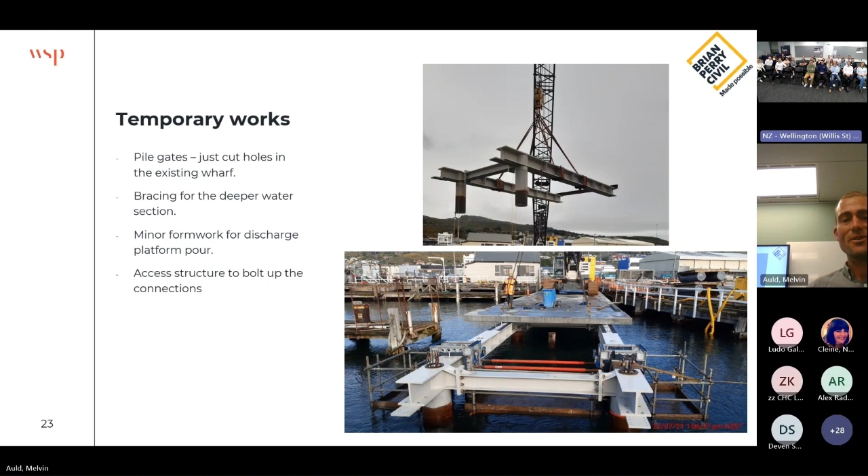So, in the entire project, about 4 items of temporary works. It really does ring true - the very smart man who used to be my boss a while ago always said that the cheapest way to do something was to not do it at all. And so in this case, the cheapest way to do the temporary works was just to not do them at all. So yeah, that's pretty much it.

Just some acknowledgements. Southport, really awesome to work with. Eastbridge and Helidrill were our contractors who did the anchors for us, helped us come up with a way to put an anchor in 15 meters below the deck of a wharf. The pipeline stakeholders, berth users, Octa with the PM, obviously WSP, and yeah, so that's it. Thanks.

Oh, there's another photo about - we won an award too.

A number of anchors - so out of 56-ish piles, we ended up doing 3... 4, I think. 4. I think one of those was a test anchor too.

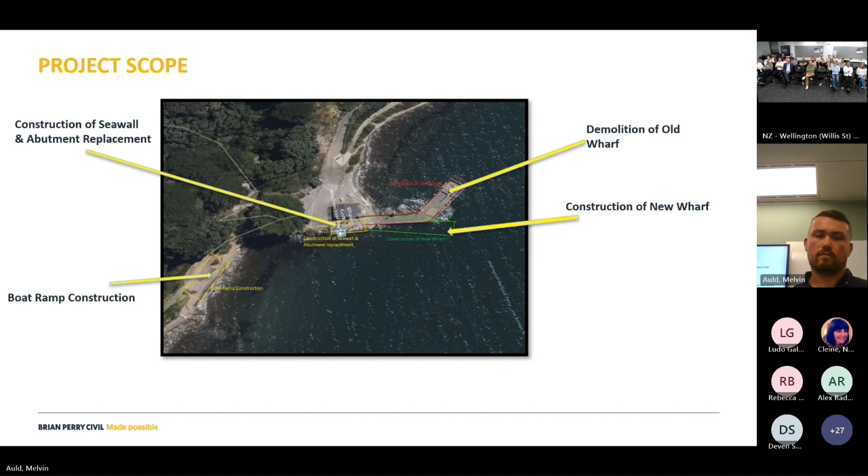So I'll go through each of the aspects of the project and the methodology just from a high level, and then maybe into some of the challenges we're looking at just in the planning stage before we go on to some of the other project challenges.

So we need to build a new boat ramp. One of the challenges here is we need to create dry working conditions because the boat ramp goes down into the water. We've been looking at how we do this because we've got a very tight budget, so obviously you could build a cofferdam, but we don't want to go down this route. We're looking to use some of the existing site backfill and some of the engineered backfill we bring in onto site to create a dry working area as a bund. Then we need to excavate down to formation level, install the formwork, backfill a sub base of AP40, lay mesh and pour the slab.

Some of the challenges we're facing so far with planning this work is getting concrete to the island. Because we're building a boat ramp on a grade, we need a fairly stiff slump to pour it. This is becoming very challenging because the concrete needs to stay workable for over 2 hours from batching onto the island. We've got around 28 meters cubed of concrete to pour, so we also need to get that onto a barge, float it over and pour it in the boat ramp. This is becoming very challenging as we've done 2 trial mixes to date and they both haven't been very successful. I'm working with mix designers at Wharf, who's our supplier, and we're trying to work a third trial to try and make this work.

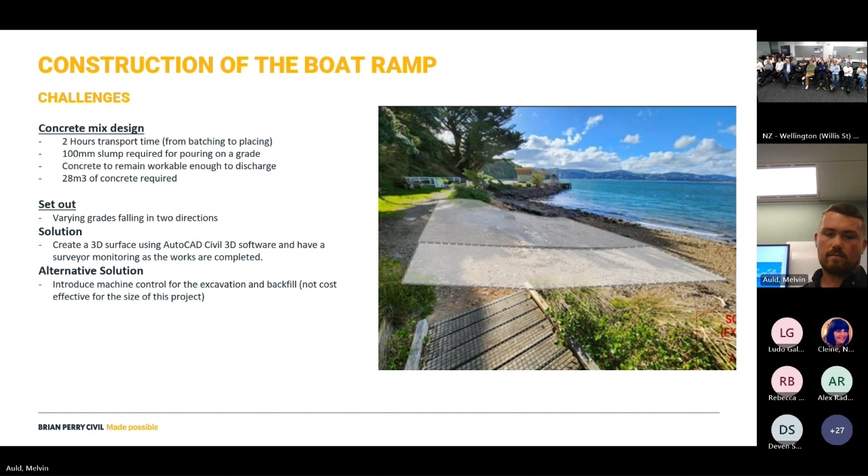So then we go on to demolishing the existing wharf. We're going to remove the existing wharf crane, remove the wharf furniture, saw cut the concrete deck, remove the deck using an excavator on a floating barge, remove the joists and remove the timber piles. We're going to use a 30-ton excavator on a floating barge.

We're going to sail it round. We saw this as a cost-effective way to reduce time in the programme, because initially we were going to use a little 8-ton barge and a smaller excavator. So we can lift larger panels, need to do less trips back to Seaview, where we're going to be servicing the project, and we can take most of the wharf on that barge in one go.

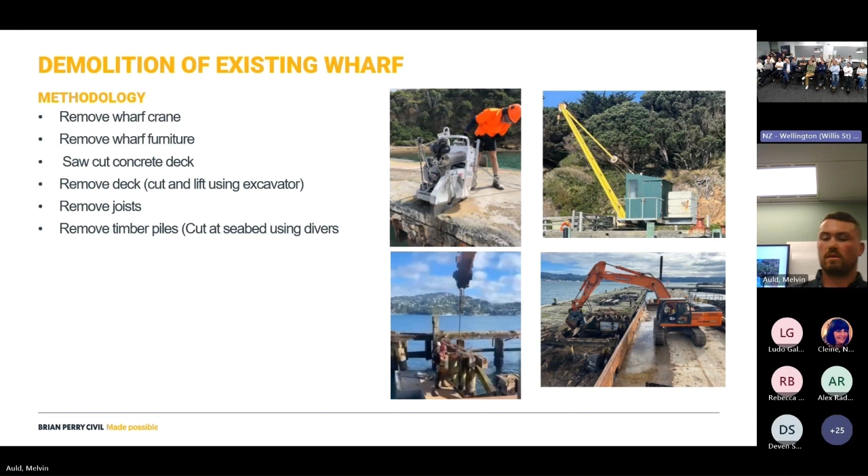So a couple of challenges here. The wharf's in quite bad structural condition, so we've submitted our methodology to Holmes to get a peer check to make sure the stability of the wharf as we deconstruct it isn't going to fall over. Then environmental control: we'll be placing a silt curtain around the wharf during demolition to stop any sediment or debris falling into the sea.

Next is seawall construction. We need to demolish the existing seawall. This involves excavating the existing ground back and breaking out the bedrock, which sits underneath the water in the tidal zone, so we need to excavate underneath there. Then we'll place magnum stones in the tidal zone, backfilling behind them, placing Duramesh baskets and backfilling behind, and then pour a new concrete slab on top.

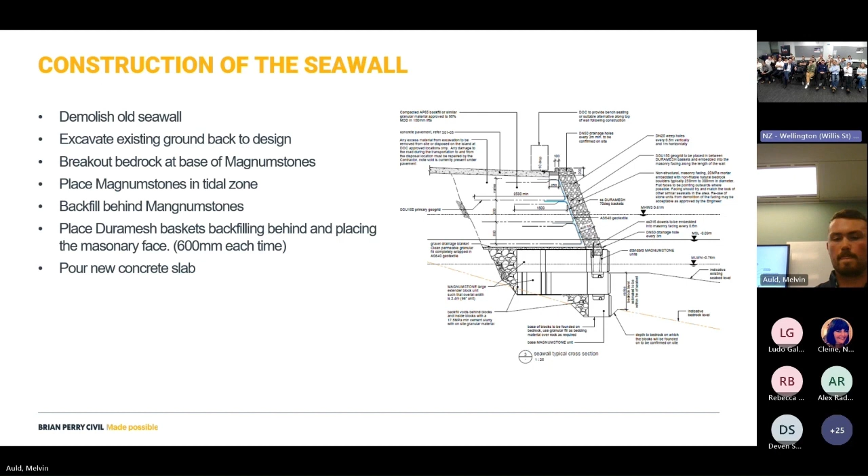Some of the challenges I've faced at the methodology stage are how, when we break out that bedrock, we get it nice and level for the precast magnum stones to go in, and how we actually place the magnum stones so they're in a nice line. If we had more room in our budget, we'd maybe use a system like Luke used, but since we're only in knee-level water, we're probably going to go with the old-fashioned method of having a guy in waders and a surveyor trying to line those in. So a couple of things in the methodology there that will be quite challenging.

Now we get into more of the meat of the project, which is the abutment wall and the wharf itself. We are going to demolish the existing abutment and put a new abutment in, made of precast concrete slabs.

To do this, first we need to install 5 piles around the existing abutment, and then place our slabs against that. After we've placed the slabs, we can concrete those slabs into place, continue our backfill, and land the capping beam on top.

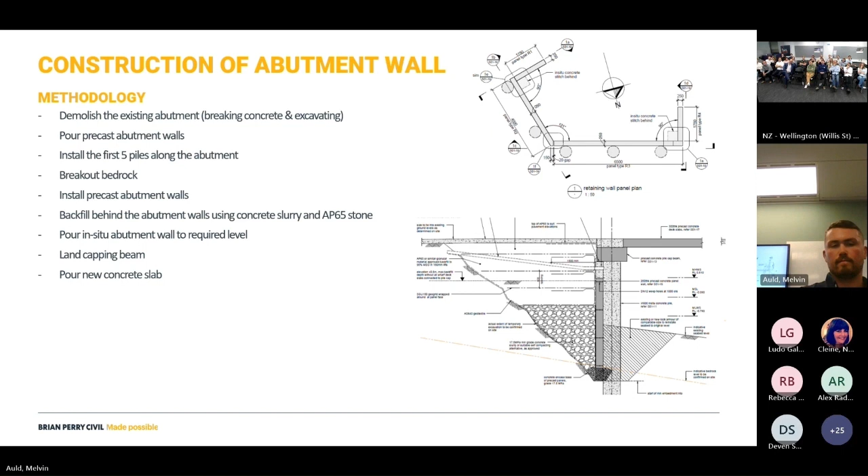A couple of issues we're having with the methodology, similar to the magnum stones, is working in that tidal zone. We're going to break out the bedrock to land the precast in, and we need a nice level surface. We'll also be pouring concrete in that tidal zone, so we need to work at low tide and have anti-washout admixture in our concrete design. We're working with Wharf to get that mix design developed, and doing a few trials with that as well.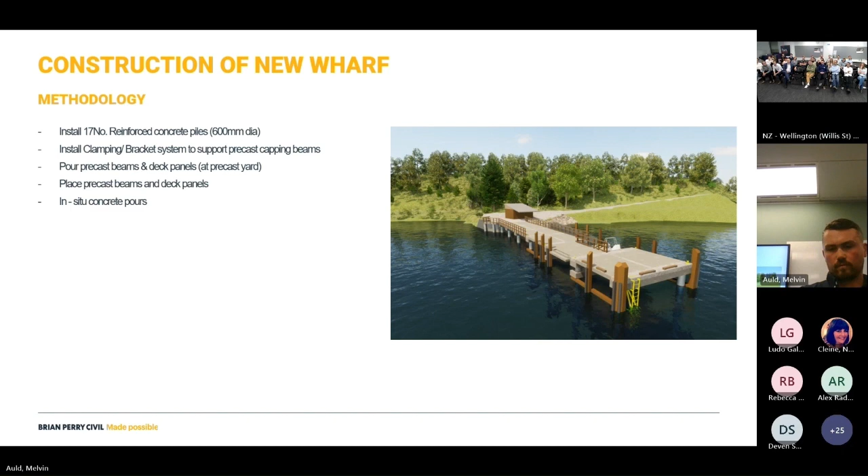As I said about the piling methodology, we'll be using the jack-up barge. Something to note about the piles is we have very tight tolerances, around 40 mil, to get that pile in the right position. This is due to the design — we've tried to make the piles smaller and ensure they're working efficiently, and because we're doing all our precast panels, it becomes a very tight tolerance.

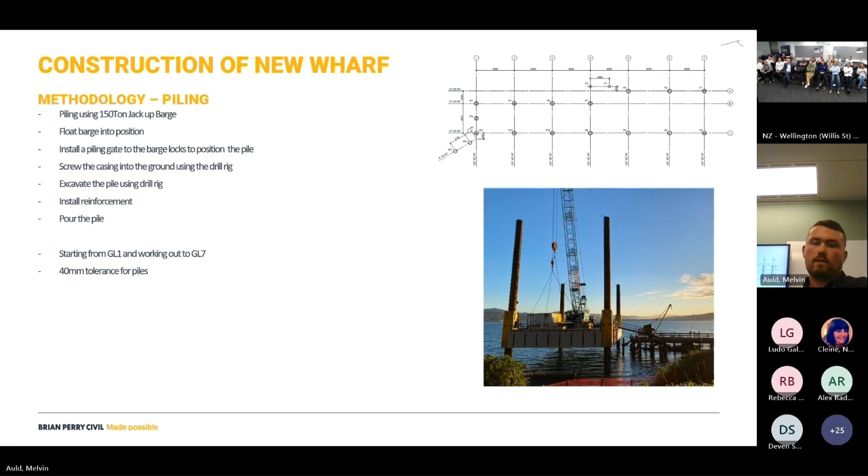To manage this tight tolerance, we've been working with our precast yard in Aotearoa, and they've come up with a system where we'll precast all the bent beams first, and then precast the slabs as they will be built in situ — essentially a build-it-before-you-build-it approach. We'll be building the wharf deck up in a precast yard before transporting it to site. That leaves us on site to manage the tolerance for the piles, while the precast tolerance has already been dealt with up at the precast yard.

Something I've been working on in the last couple of days: we originally went to tender and said we would clamp underneath the pile with a friction clamp before landing the beams onto it. We've figured out recently that this is going to be very difficult to do for two reasons. Installing the clamp while we're piling means the crane's going to be busy, so we don't want to be trying to install a clamp with men in the water, in a floating pontoon.

Also, when we go to de-stress the friction clamp afterwards, we'd need to make sure there was no corrosion on the stress bars, and this would be difficult since it's in the tidal zone. We're looking at a different system, similar to Luke's project, where we weld brackets onto the pile. They won't be taking a lot of load, so we hope to do this from a boat or pontoon. I'm working on it with the Temporary Works Department to develop that design.

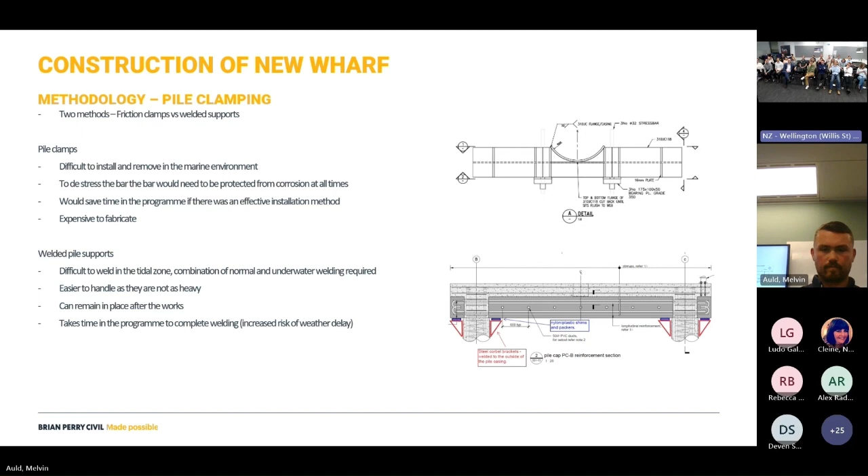Something very important to our client, Department of Conservation, is biosecurity. This is a challenge overall to the project. We need to make sure everything, including people, is biosecure before we get there—vessels, jack-up barges, materials, literally everything we take to the island. We do checks every single morning, and every time materials get transported. We also work full-time with a biosecurity officer from Department of Conservation. They keep us right, they're the experts, but we try our best to do our checks before they come and do the final.

I know that was quite a quick presentation. I don't have a lot of interesting pictures, but if you've got any questions, please let me know.

You got any more consent conditions at that location compared to the Seaview?

So we've got similar consent conditions in terms of the aquifer. We're a bit more free with noise as we're out on the island, but we have conditions around light. Because there's a lot of habitat on the island—penguins, tuatara, and such—we can't work in darkness. We can't illuminate the island; it needs to stay dark. That's quite a constraint for the contractor, because if you start falling behind program, normally you'd put on a night shift or work later hours, but we don't have that option here. So yeah, that's a constraint as well.